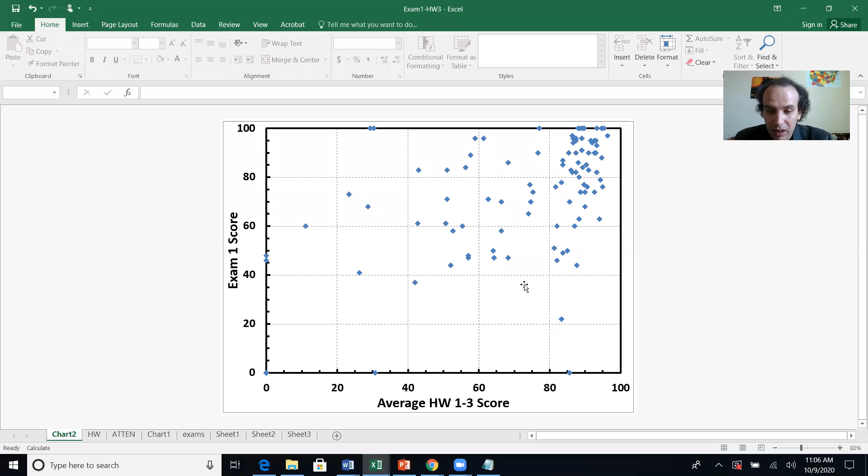Your midterm score will be based on your exam 1, with maybe some small correlation with homework. So if you really have a drastic change between homeworks and exam, I may correlate it. But basically your exam score is your midterm score, and you will see it posted. Does it make sense? I believe so.

Now I come back to my slides. You see my slides now, and I recall what we are doing here. Last time we discussed all our objectives, so basically we talk about closed systems, typically something like a piston cylinder assembly, which can be at constant pressure, constant volume, whatever it is. And we discuss processes. Unlike chapter 3, now we talk about processes. We will never have one state, we will have several states.

So we have a so-called quasi-equilibrium process between state 1 and state 2, for instance, and your task will be to identify both states and identify work done, heat transfer, change in energy, and so on. I repeat this because I want you to remember.

So you will have some kind of equation of the process here, and this equation should be known, should be considered. Now, you will have the first law, which is energy balance. I considered it last time. And what is boundary work?

What is work here? Q and W, it's heat transfer and work transfer in this process. Please remember that work is not necessarily boundary work. It's okay, most likely we deal with boundary work in this class, but there may be other forms of energy, like electric energy, stirring, mixing. It may be something happening in a closed chamber with mixing. So please realize these items can be different. Potentially you may have one more source, which is work other, as I call it here.

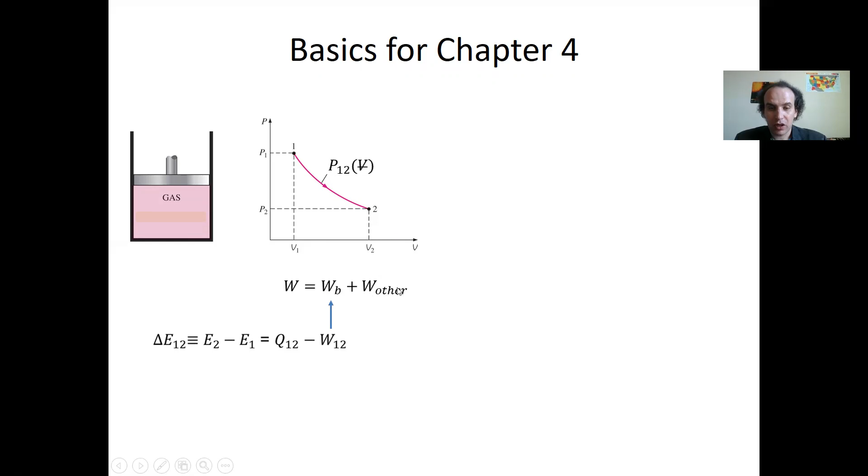Now you have this equation of the process. And also you know that your boundary work, only boundary work, is nothing but integral P dV, that's the surface area in this diagram. That's what it is. So in fact, what you're doing all the time is solving this set of equations.

But now, very often it will be simplified because you don't have some terms here. Well, you may have more terms, you may have more processes. So it may be not one process, you may have many of them. Then you should be able to do the system for each particular process, for this one, and this one.

And when you integrate it over the cycle, you will come to what? That energy does not change over the cycle, and you have that heat over the cycle is equal to work over the cycle. Q net is equal to W net. They both can be positive, they both can be negative, but they are not zero. And we are lucky because of this.

We are lucky that there is no conservation of work and heat, because they are additive and they are transformable. Energy cannot be destroyed or generated, but it goes from one form to another. So heat and work, heat can be converted into work and work into heat. Why? Because both heat and work are not functions of state, they are functions of the process. Remember, they're not a property. That's why when we start with one point and after a cycle go back to the same point, it will be zero for a cycle if it's a property, but it will be not zero for Q and W. Remember this.

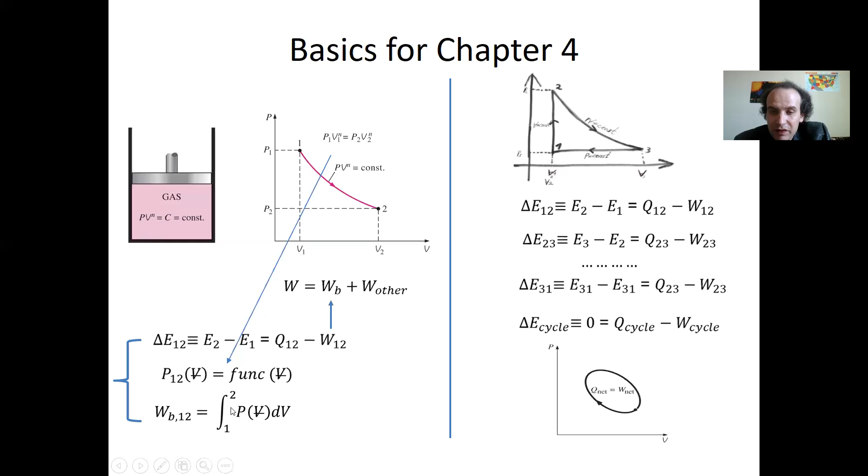Now, why polytropic processes? We considered this last time. One, because a polytropic equation of this form is easy to integrate. Second, because typical processes we have in practice are indeed polytropic. Remember, we discussed it for a while.

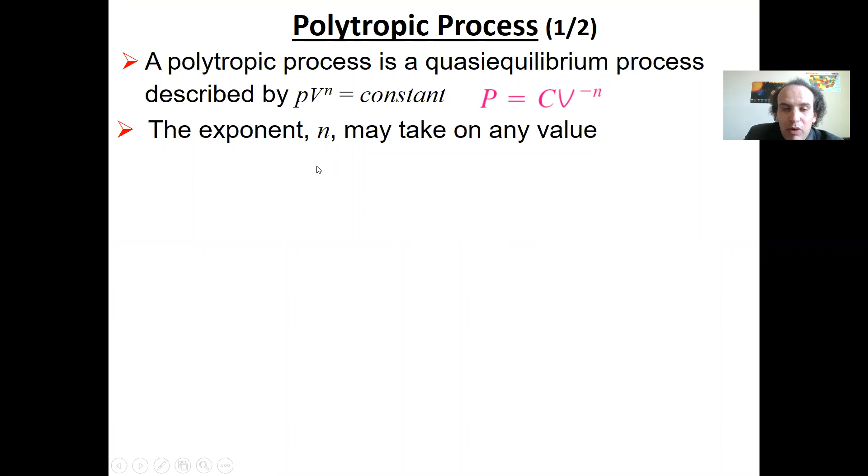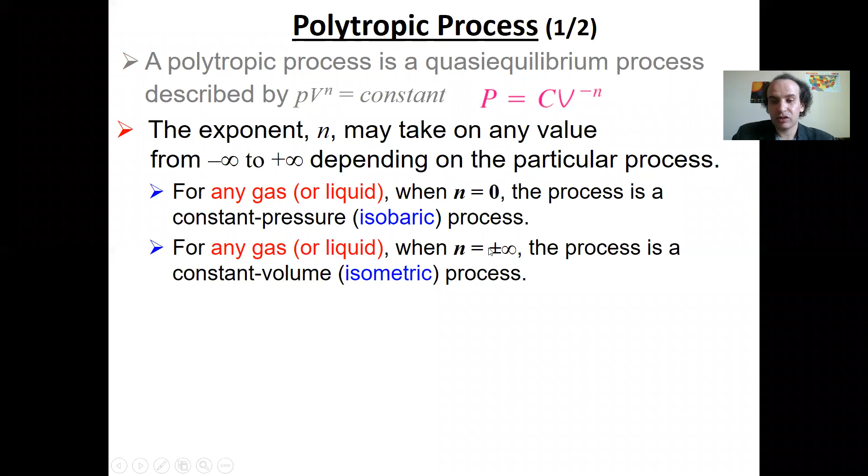So basically, that n here is some constant, and depending on what n is, you get some process that you know. For instance, if n equals 0, it's isobaric, pressure is constant. If n equals plus or minus infinity, for ideal gas, it's isothermal... actually if n tends to infinity, it's isochoric. If n equals 1, for ideal gas, we have isothermal process. And you have this table.

We didn't touch adiabatic processes yet—we'll talk about this maybe on Monday. But you may realize that all the iso processes we deal with—isobaric, isochoric, isothermal, adiabatic, isentropic later—they are actually polytropic. That's why it's so convenient to consider the polytropic process: it describes reality, and second, it gives you nice formulas. You're able to integrate on the PV diagram and get results.

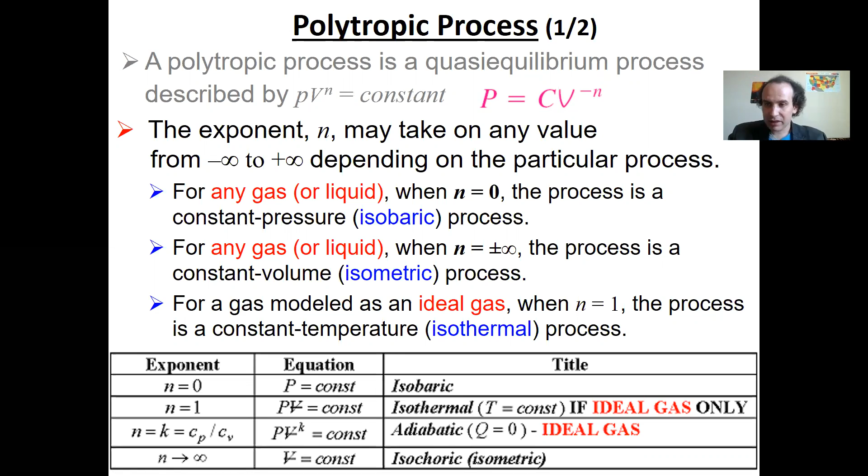Right, so remember these formulas, I recall we discussed last time. Generally speaking, for any n except for 1, your boundary work will be this formula. You see it, right? So basically you know the formula, you can use it. But why did we derive it? Because I recall you should not use this formula all the time.

For instance, if your n equals 1, it gives you a singularity. So for n equals 1, you should use this other formula—PV logarithm and volumes ratio. Okay, otherwise this formula is for arbitrary n.

Even for particular cases like isochoric or isobaric, it works. Because if you take n equals 0, you come to the formula selected in gray here, right—it gives you the isobaric process. If n tends to infinity, this formula gives you 0, as it should for an isochoric process. What is isochoric on a PV diagram? It's a vertical line, and there's no area under a vertical line, so it's 0.

Remember, if you have a rigid tank, boundary work is 0—dV is 0, the boundary does not move, the boundary cannot produce work. Does it make sense?

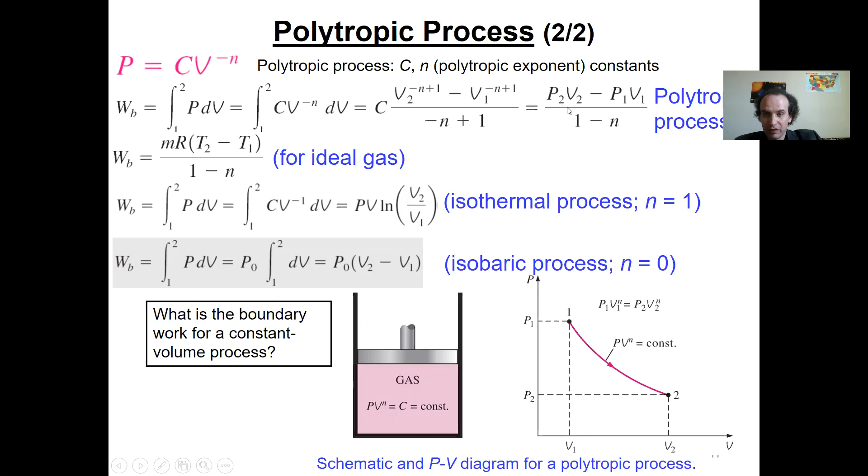Again, remember our classical convention: work is positive for expansion if it's done by the system, and work is negative for compression if it's done on the system—active and passive voice. So always remember, if you have expansion, it should be positive; if you have compression, it should be negative. If you get something different, something is wrong. Right? We discussed this last time.

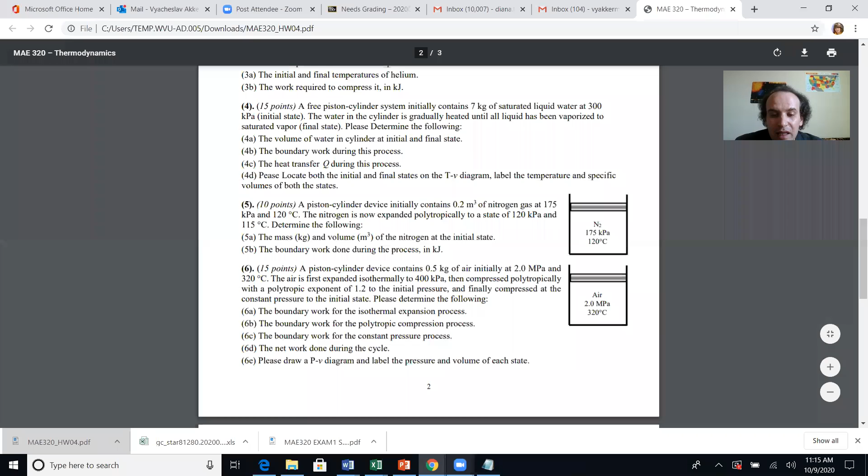And we also considered an example. I spend time on this again because it's some basics I don't want you to miss. This is something you need to remember—it's your homework—but I want to show you something else. I remember last time we considered a couple of examples from your textbook, and we discussed that boundary work is 0 if you have an isochoric process.

Here, you may see my screen—this is a PV diagram. What is an isochoric process? It's like this. Whatever it is, compression or expansion—here it's actually expansion, I mean here it's pressure drop and pressure jump. So basically what does it mean here? As soon as you don't have a change in volume, there is no surface area under this line, and boundary work will be 0.

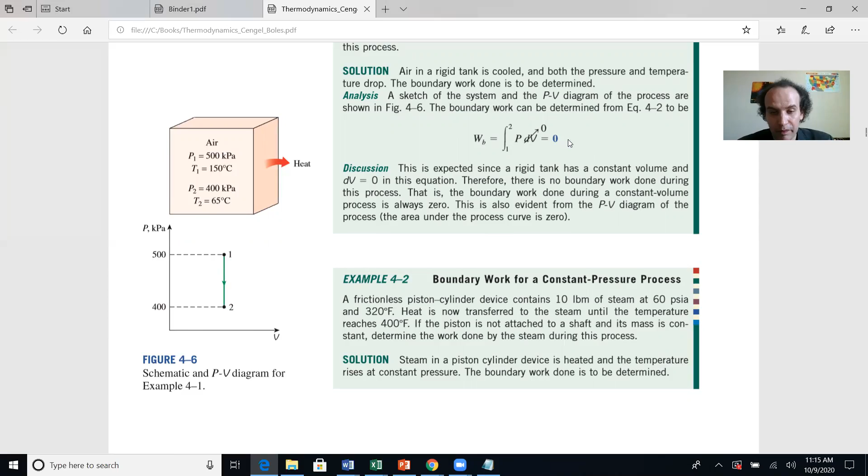For other processes, we consider what happens if you have an isothermal process, and you may realize here that it is, right? And basically last time we considered the example for ideal gas—you can look again, it's an example from your textbook. So how do we solve the problem? You use state 1, which was given pressure and temperature, identify state 2, and based on this you take your integration, and that's what you calculate, right?

And you find this value, and you got that boundary work will be negative because it's compression, right? It's compression—you go from state 1 to state 2, so this surface area is positive, but work is negative. Work equals minus this surface area. Any question about this?

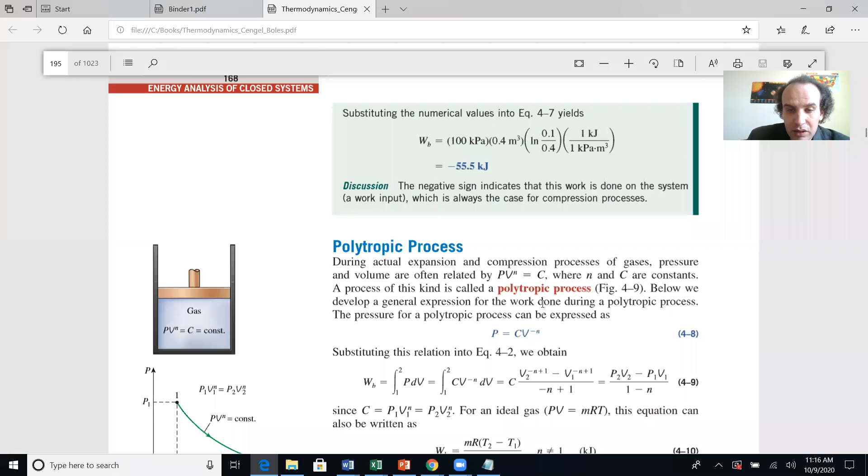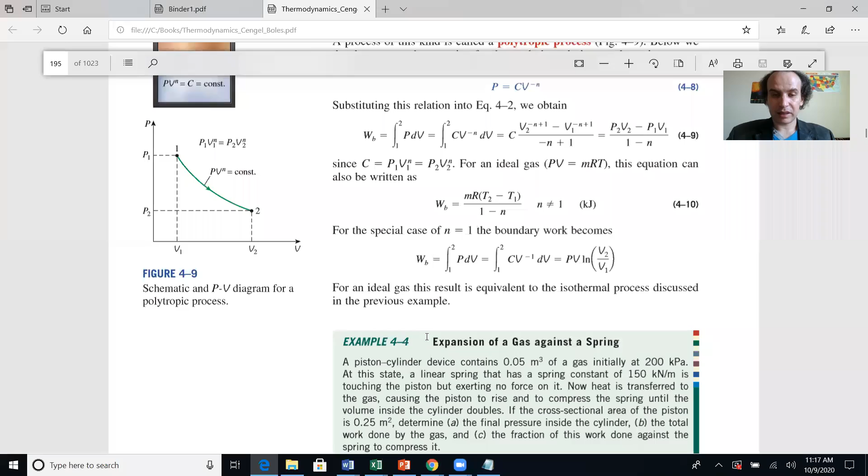Well, in the general case, you consider the basic equation, it will be like this. So basically, you don't know n. You should be able to solve this equation properly, identify another state from state 1, and consider it—and we considered these examples, right? So let me see if we can consider any more. I will come to this example a little bit later.

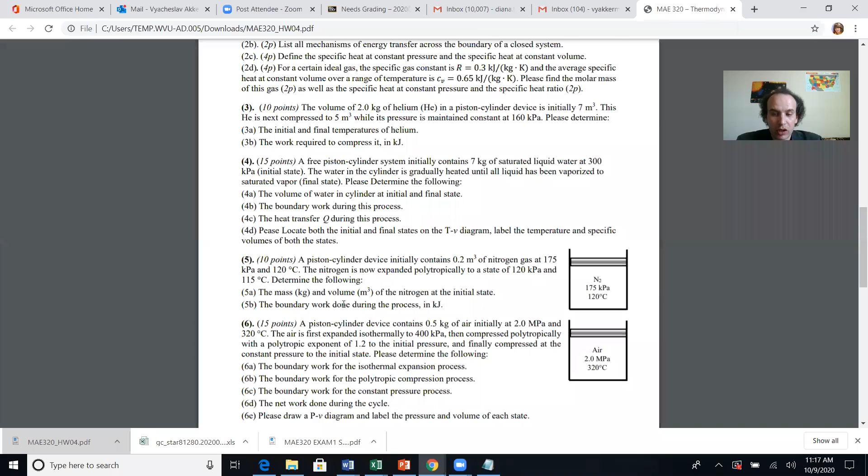Okay, does it make sense? So basically that is it. If you look at your homework, here is your homework. Let's look at it together.

Basically, here are your equations. Let's see what we have here. It's stated here, let's look, for instance, at problem number 6. Let's look together. What is stated here?

You have a piston cylinder device which has 0.5 kilograms of air initially at 2 megapascals and 320 degrees Celsius. Then air is expanded isothermally to 400 kilopascal, and then compressed polytropically to the initial pressure. Finally, it's compressed to the initial state. You will need to determine all these items like boundary work and so on.

So what should you do here? I request you to remember the following: in all problems like this, you identify states one by one, okay? You will identify states one by one. So what do you know here?

Do you know the state? So you have air at 2 megapascals and 320 degrees Celsius. Will you be able to identify the state? Yes. Now, what is stated there? Then air expands isothermally, so it's an isothermal expansion for an ideal gas to this value. Will you be able to identify state 2?

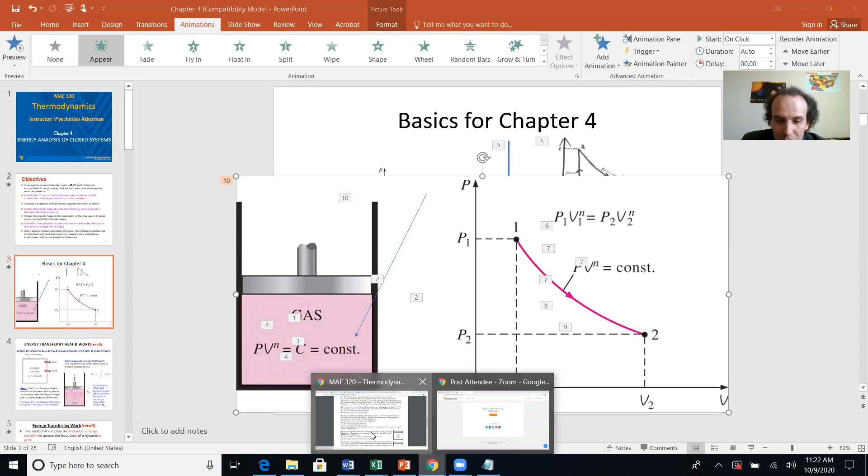So from here, you should be able to find N. It's not typical because typically you know N and you don't know other items, but here you should be able to find it. Now it's stated: please find the mass and volume of nitrogen at the initial state.

How do you find mass? Well, what is mass by definition? It will be density times volume, rho V, or it will be V divided by specific volume. Do you know your volume at the initial state?

Yes, you know. Do you know your specific volume at this given pressure and temperature? Do you know it? So will you be able to find it, the specific volume? Yes, exactly, you know ideal gas law.

So will you know mass and volume at the initial state? I believe so. Now what will be the final state? Will mass change at the final state? It's a closed system, so mass will be the same. But what about volume, will volume be the same?

No, volume will not be the same because it's stated here that you have polytropic expansion. So your volume expanded, you will have new specific volume, new total volume, right? And that's okay, mass will be the same because you change specific volume. Density will change. Does it make sense?

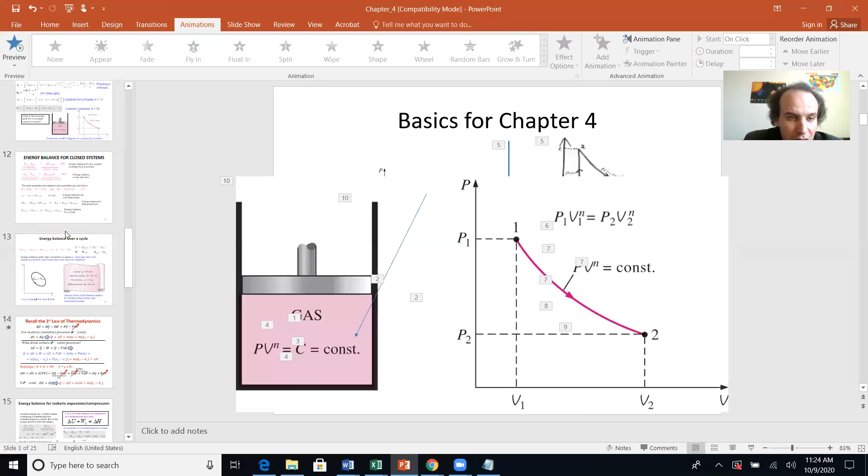You already know how to deal with it. Do you know the formula? Which formula will you use? You will use that formula? So what is your P1, V1, P2, V2? Will you know it? Yes. Will you know N? You will find it, right?

So that is it. Again, I'm not solving the problem here, I give you hints, it's your homework, you should solve your problem yourself, then you'll be good at your exam. But that's your typical strategy to consider: identify both states, then calculate boundary work and write down the first law. Does it make sense? Any question now?

Now, before we proceed to heat capacities, I want to focus specifically on the isobaric process. Remember, it's important: generally speaking, for an isobaric process, what will you have from this equation? You will have that boundary work is P delta V, right? It's understandable, it comes from here.

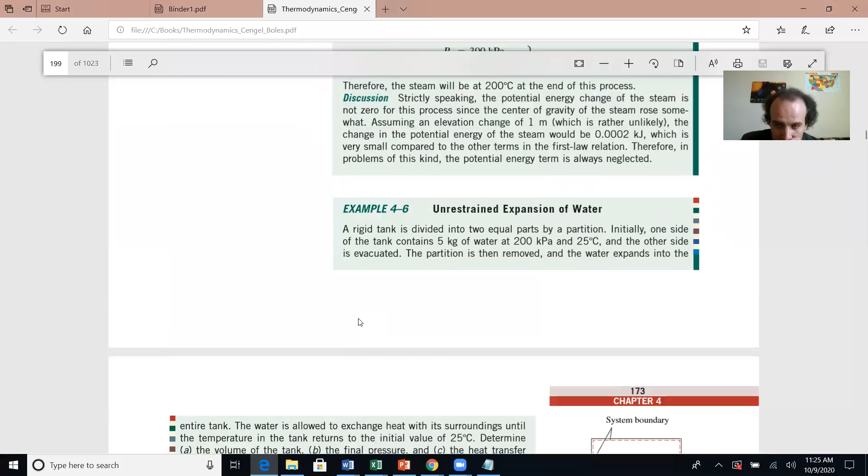Basically, if you look even in your example in your textbook, a simple example, like example 2, you will realize that for an isobaric process, this surface area, it will be the integral, so it will be P delta V, correct? That's what you have, P delta V.

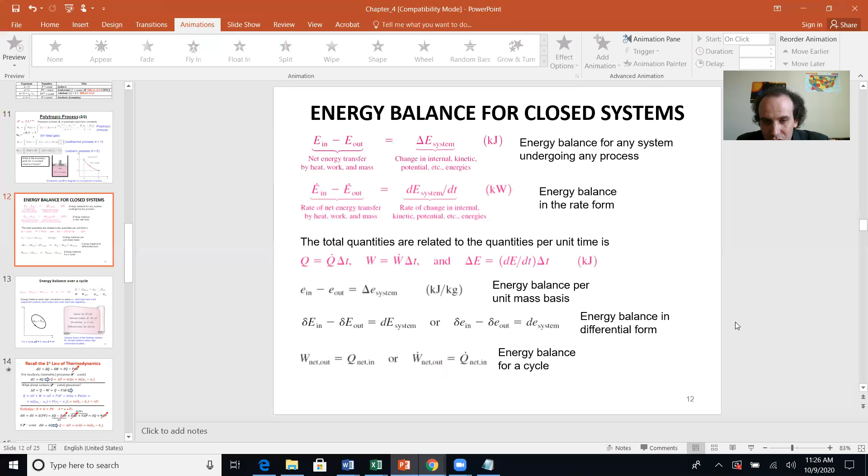But I want to focus on something else: on enthalpy and on heat transfer in that case, because remember what is enthalpy? We introduced enthalpy as U plus PV, and I told you that enthalpy will play a crucial role in this course, so you should be very flexible with it. Remember, enthalpy does not exist in reality, but it's a very convenient parameter which helps you solve the problem. It's like adjusted gross income. Remember, energy exists; enthalpy is just a combination U plus PV.

Now I recall what I did in chapter 3 because I want you to consider it seriously and solve some problems. So what do we have? If we write down the first law of thermodynamics in differential form, it looks like this: dU equals dQ minus dW, this is heat, this is work. I write delta here because they're not exact differentials, they're a function of the process.

So it becomes dU is dQ minus P dV, correct? So if I have an isochoric process, that is, if my volume is constant, what does it mean? It means my boundary work will be 0, and I have delta U equal to Q. So if you ask me what is heat transfer in an isochoric process, it's very simple to answer: it will be this. Correct? Does it make sense?

So internal energy is a good item to deal with, a good function to deal with for an isochoric process. But what about an isobaric process? In isobaric, will you have exactly the same equation? No, why not? Because for an isobaric process, this term is not cancelled, you have boundary work. True?

True, but we are still lucky a little bit, because for isobaric process it's still some simplification. So you don't need to take integral. You can do something simple. And for this reason, remember what we do.

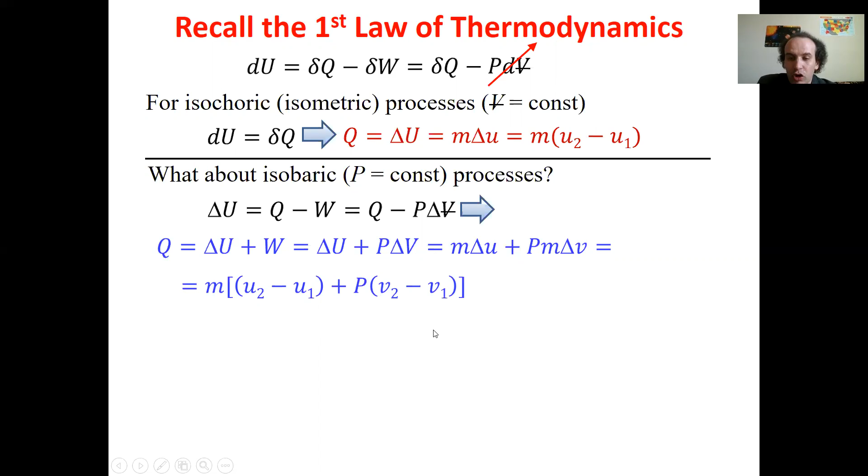So if my pressure is constant, I will take it out of here. I will write M delta U plus this, and I will come to this equation. Does it make sense? That is my Q. And in your homework, that is how you may calculate. That is your expression.

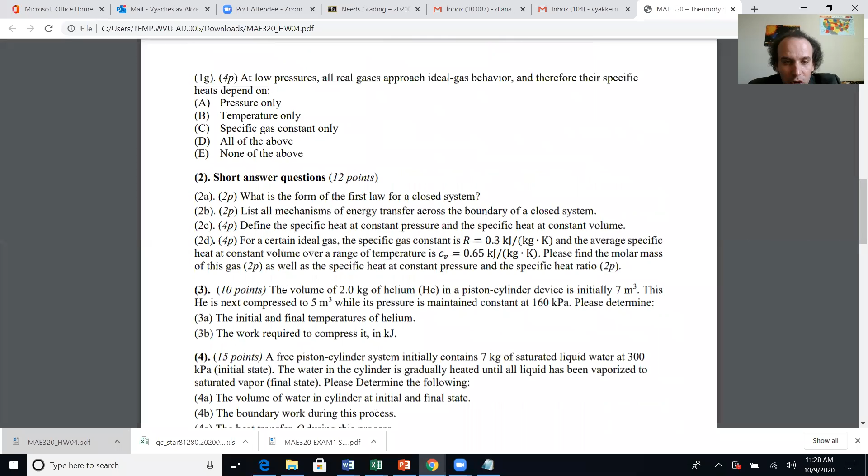And if I stop at this point and go to your homework again, what will I see here? Look here, for instance, homework problem number 4. It's stated: a free piston cylinder assembly initially contains 7 kilograms of saturated liquid water at 300 kilopascals. So state 1 is saturated H2O at 300 kilopascals.

So do you know the state? Do you know everything in state 1? If it's saturated liquid, you'll know VF, UF, HF, SF, right? All these parameters — specific volume, everything we need.

Then it's stated that the cylinder is gradually heated until eventually the liquid has vaporized to saturated vapor. So as a final state, you have saturated vapor only, correct? Do you know the second state? It will be saturated vapor at exactly the same pressure, 300 kilopascals. So you have the same pressure, and you know all final parameters.

Then it states, they ask you, what is the volume of water at the initial and final state? How will you find it? How to find the volume? Will you be able to find specific volume at the initial and final state?

I believe so. Will you be able to find total volume if we multiply by mass? I believe so. Will you be able to find boundary work and heat transfer? You may say, okay, boundary work will be P delta V, heat transfer will be exactly what we discussed here. But I recall something — that's why we introduce enthalpy.

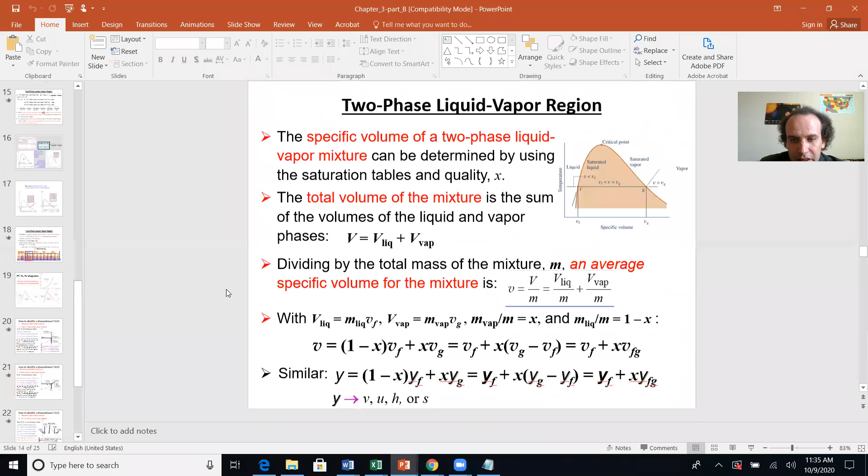Recall this, at this point, let me open again the slides that we dealt with for chapter 3, part B, right? And remember, we talked about this when we considered examples. I think it was here, right? Yes, here it is. Remember, that is the example that we consider.

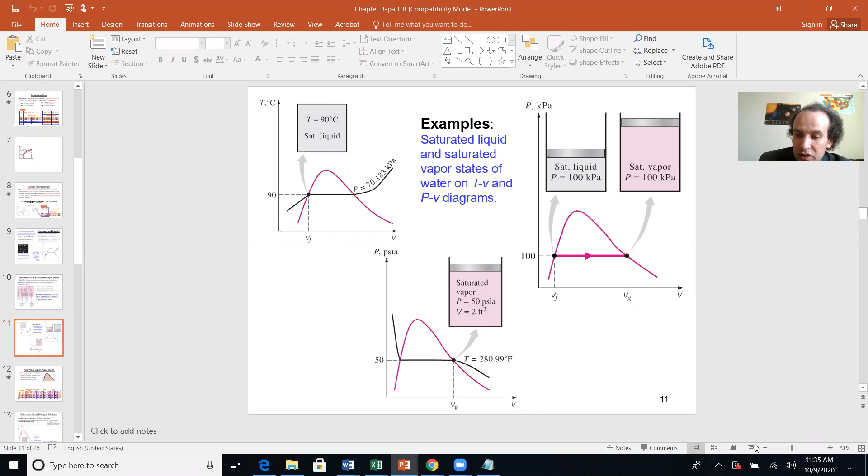You may see it on the screen. Remember? So what do we have here? This is exactly the example from your homework, but pressure is different. Now pressure is not 100 kilopascals, but 300 kilopascals. Otherwise it's the same.

So what do we have at the very beginning? This is saturated liquid, this is saturated vapor. So what will be work done if you consider it like this? It's exactly your example from your homework.

What is boundary work then? It will be this, right? Do you agree? So boundary work will be what? Here, it will be what? It will be P delta V. Correct? Do you understand? Do you agree with me?

But also what will it be in our case? Instead of V, you can write it like it will be what? It will be P, M, and what? What will be delta V? It will be V2 minus V1. Correct? Do you agree?

What is V2 and V1 in our case? It will be VG and VF. Do you agree? Everybody understands this? Everybody understand why mass is out of the brackets? Because mass is constant, since we talk about specific values.

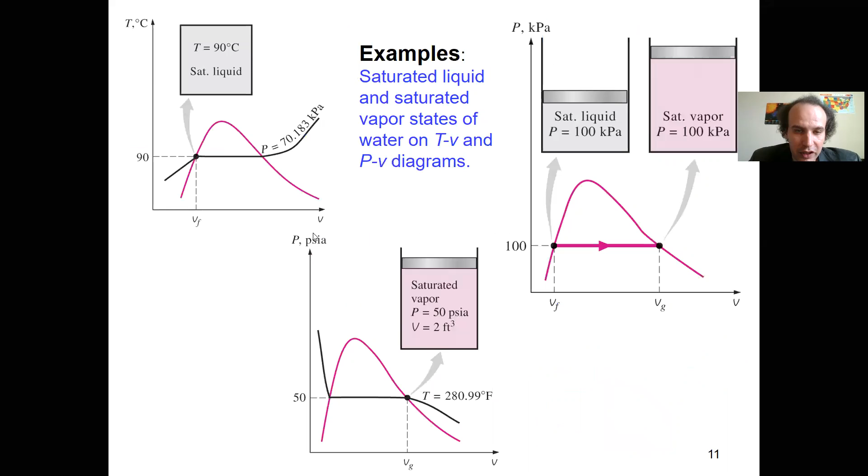I believe this is helpful. And the same story here. If you look at the screen, you can use this blue formula if you want. You can use it like this, and you will come to exactly the same answer.

What will be V1 and V2 here in all cases? It will be VF, VG, UF, UG. But altogether, it can be easily combined to this one, which we just calculated. Does it make sense for you?

This happens only if you have isobaric process. If pressure is not constant, what I'm talking about will be wrong. Do you agree with me? It will be wrong, and you cannot use it. Please understand, it will be wrong.

If you have isochoric process, what I'm talking here will be okay, but it will be useless, because you don't need to calculate boundary work at all. Does it make sense?

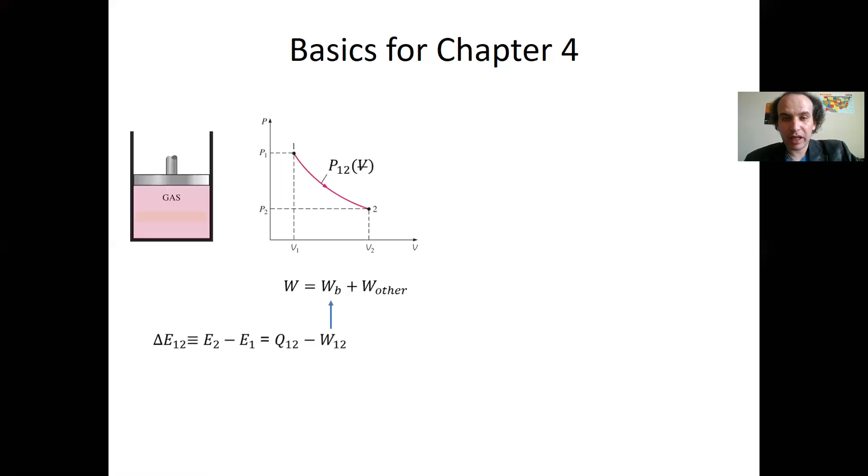Again, I recall when you write the first law, like you did it here. You should realize that generally speaking, you may have boundary work plus something else, like electric work. You have a very good example in your textbook, and we discuss it, and now let me discuss it again.

Before I go to the textbook, let me go back to your homework problem, here it is. So do you know now how to solve problem number 5? Everything is clear? Everything is quite simple now? And problem number 4, everything is clear now?

So did you say for an isothermal process, Q equals M delta H doesn't apply? Is that what you said? Yes, it does not apply. Why? Let me ask you vice versa, why should it apply? Temperature is constant.

What we derived here was when pressure is constant. Do you agree that everything I talk about here is when pressure is constant? If pressure is not constant, everything will be different. Do you agree? Yeah, okay, that's why. For the isothermal process, you consider just a very general equation, because now you need to take integral PdV instead of taking P delta V.

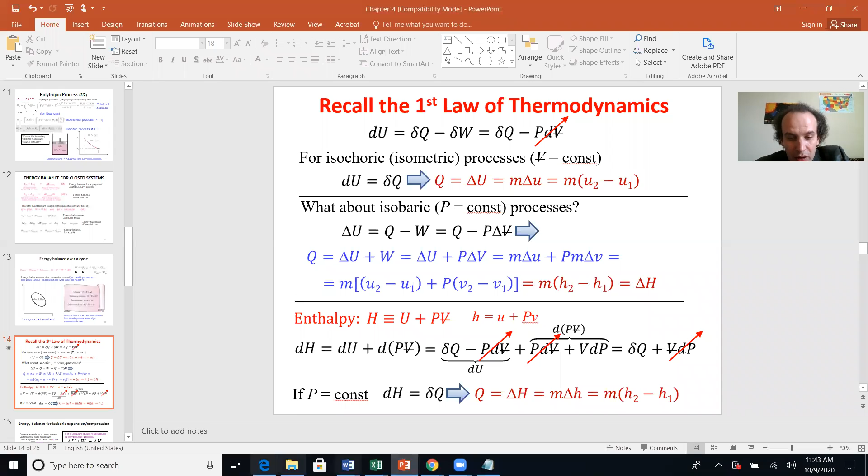So basically, if you talk about your homework problem number 4, does it make sense how to solve it now? Here you are lucky. When you read about free piston cylinder assembly, you are lucky to use the simplification, and basically all these equations can be solved. In the general case, if you have different pressures, like you see in problem number 3, you solve your equation like it is. That's a general form. And now you should also be able to get your knowledge from the text.

If it's stated you have a rigid tank, it means volume is constant. If it's stated you have a free piston cylinder system, it means pressure is constant. If it's stated it's isothermal, temperature is constant. If it's stated it's adiabatic, Q is 0. Based on this, you may get some knowledge, some data that you can use.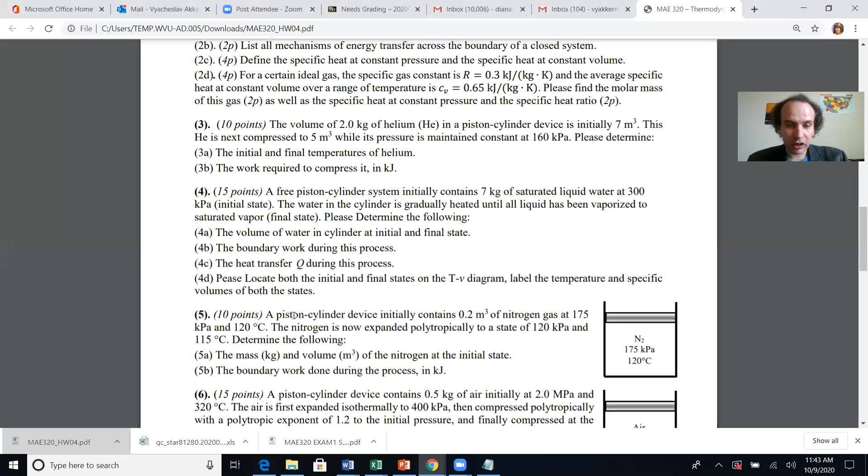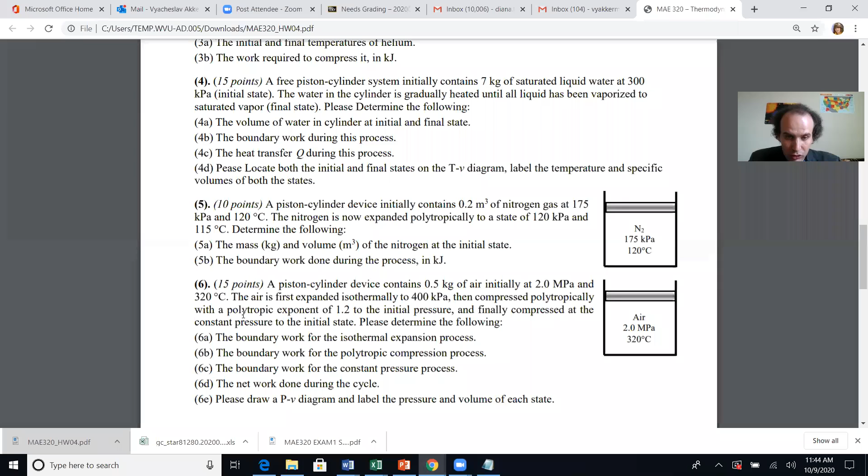In your homework, in the textbook, I believe you know how to solve problems number 4, 5, 6 now. It should be more or less okay for you. Please, you have this weekend ahead. Please do it, and if you have questions, bring it on Monday, because it's really important. Again, it's something basic, but something simple. When you get it, it will be easy. If you don't get it, you're stuck.

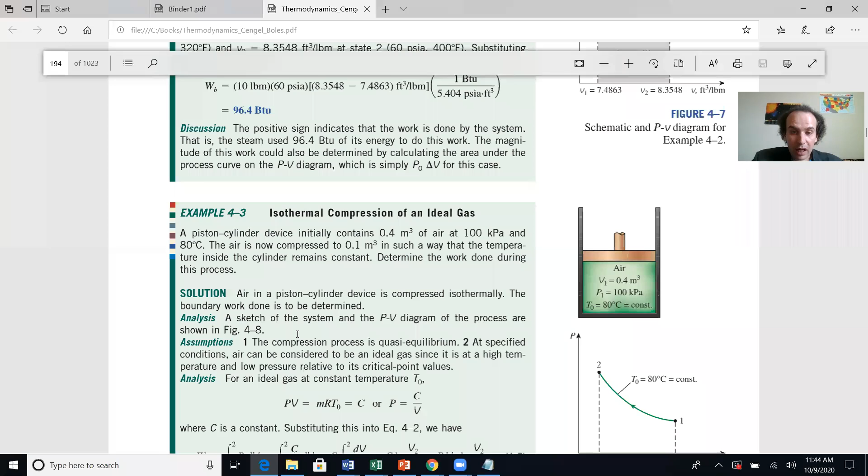So please do it. Now, in fact, we discuss this problem. So again, only if constant pressure, we come to this topic. You have these relations between delta U and delta H, you have this formula. You may ask, why don't you use it for an isothermal process? The answer is simple: because we derived it only for isobaric. What you see here in the formulas is exactly what we talk about.

What we talk about here is that instead of, in addition to, boundary work, you may have something else. You may have extra work. So what you see here is exactly what I discussed in the first slide. Remember, here we have this term and you have energy change. I have W equal to boundary work plus other work.

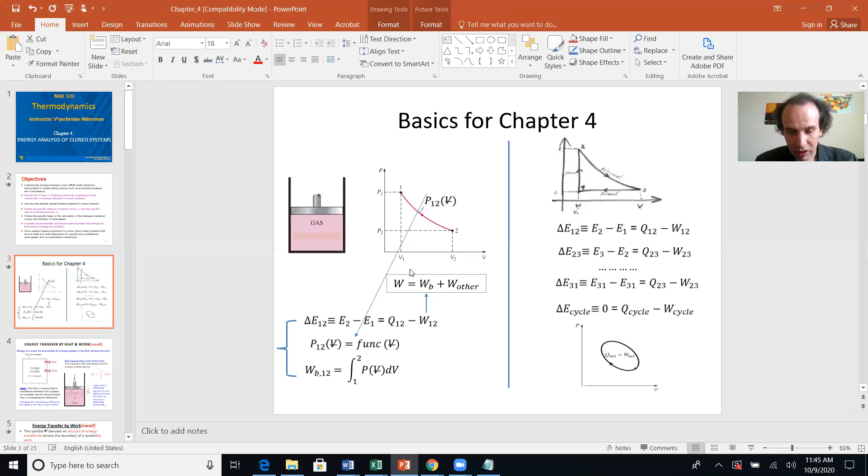Then I should account for it, and that's what I have here. On the left-hand side you see what I write: Q minus W is delta U. It's nothing but the first law, as often you neglect kinetic and potential energy.

But now we realize, what is W here? It's nothing but a combination of this. You express it as other work plus boundary work. What is your boundary work for an isobaric process? It will be here. That's how you arrive at this formula: Q minus this work, which can be electric work, it can be anything, minus this gives you delta U.

Now you see what you see here. You have this equation I wrote. I combined U together, and do you agree that this equation can be rewritten like this? It's the same, right? I just changed parameters, changed the order of terms. Do you agree that this is enthalpy? What is this one? It's enthalpy.

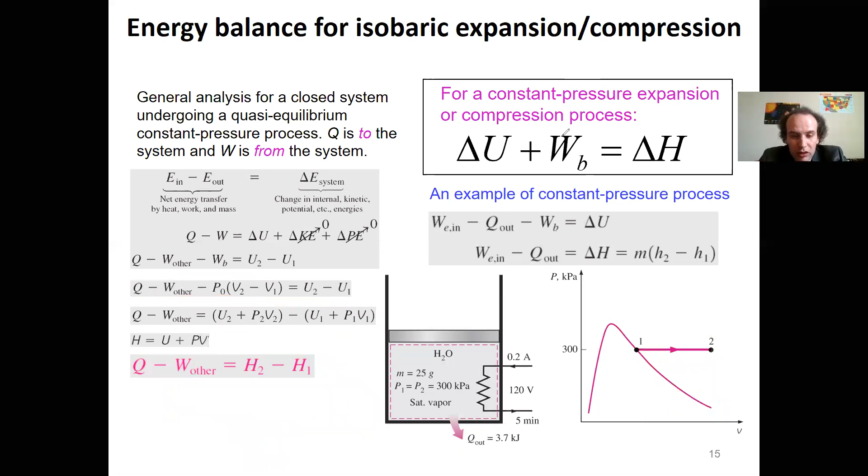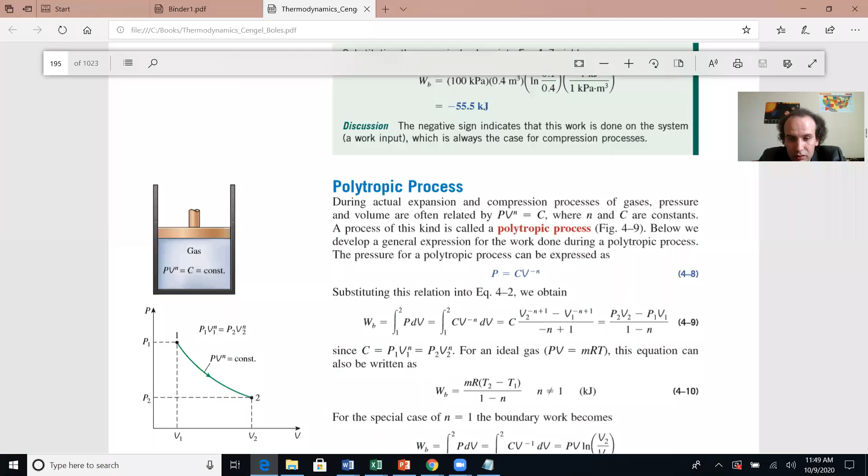Let's consider this on the screen. Here is the example from your textbook. You may read the text again. You have this piston cylinder assembly, exactly the same. Initially you have 25 grams of saturated vapor at a given constant pressure.

You put this resistor heater with given current and voltage, and it works for 5 minutes to deposit electric work into the system. What happened with your system? In your system you will have superheated vapor, and at the same time your system will expand, so eventually we'll have another volume here, and at the same time you'll have some heat loss. That is a picture just exactly like we discussed on the slide. So what will be our equations? I won't repeat it again.

Do you understand that these are exactly the same equations that we discussed? So what we have here is our balance equation, that heat minus work together gives you U2 minus U1. So this is our equation, and we come to the following: Q minus work done by others is like this.

Now, what is this again, and what is this? It's enthalpy. And what is this? It's, as we discussed, work done by electric setup. So that's all. Will you be able to find Q from here?

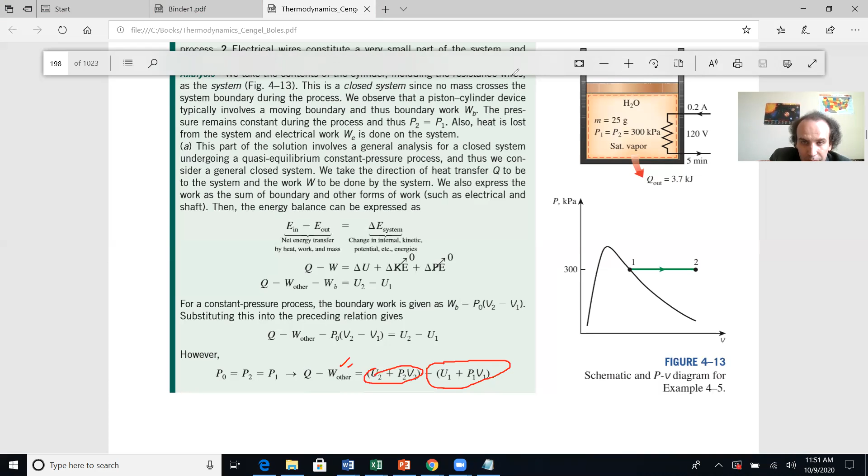You should. Here it is, right? So you will find Q, and whatever you need to find from here, you will find. Do you know state 1? You have state 1. So from here, you will be able to calculate enthalpy 1, and from here you will calculate H2. And then when you know H2, you will definitely be able to calculate state 2.

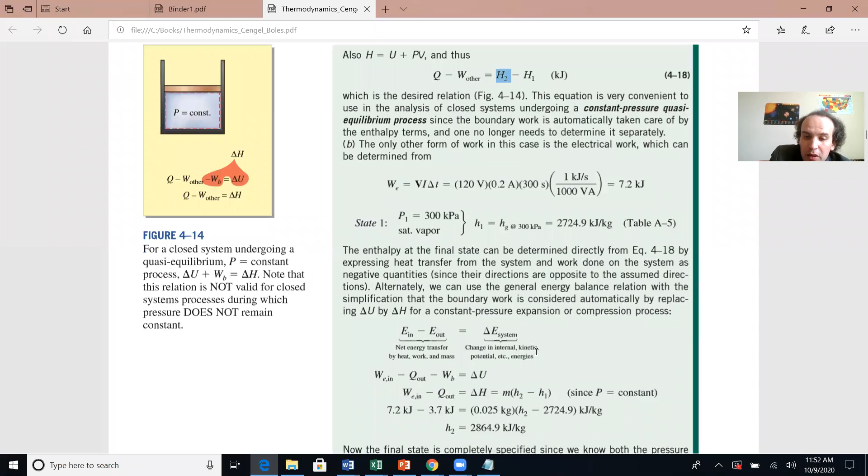So in this equation, what do you know? Do you know state 1 entirely, right? Do you know Q? Do you know work done by the other setup, which is electric work? Yes. Will you be able to identify H2 from here? If you know H2, will you be able to identify small h2, which is specific enthalpy, from here?

If you know h2 and p2, you'll be able to get temperature. So instead of saturated vapor, you will have superheated at this condition. Does it make sense?

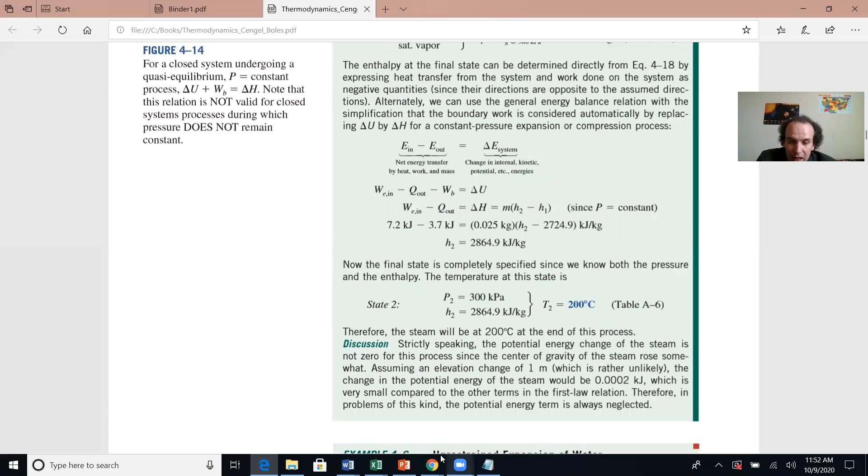Please ask me something. So that's the basics, and now you are mostly ready. Please go through this example yourself at home, and you will see that now you can solve most of the problems from this homework.

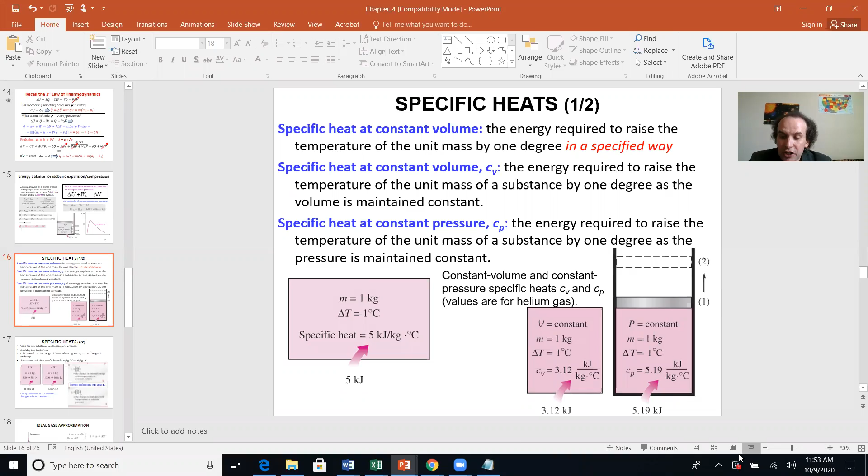The only part left after this is what we call heat capacity. I will do this on Monday. Heat capacities, or specific heats, tell you how much heat you may consume if you proceed in some specific way. Because remember, if you have isobaric, isochoric, or other processes, you need different amounts of energy to increase your temperature by 1 degree.

If you have an isothermal process, how much energy do you need to increase your temperature by 1 degree? It will be infinity, because you never change it. If you have an adiabatic process, how much energy do you need to change temperature by 1 degree? You need 0, because it's adiabatic — you don't have heat exchange. But for a typical process like isobaric or isochoric, this is a finite value, and we will consider it.

Basically, why I will talk about this on Monday — but what I want to show right away, coming back to this formula, it's very important. If you look at this formula, for an isochoric process, delta U is equal to Q.

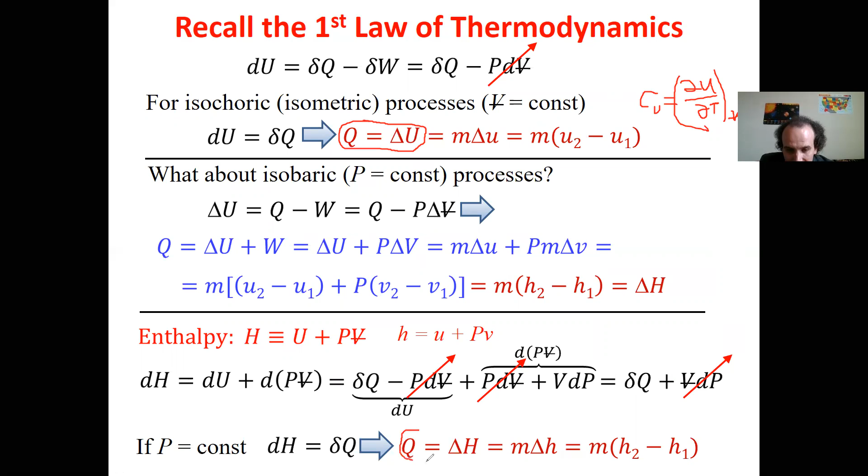From here, you will see that Cv, heat capacity at isochoric process, will be nothing but dU over dT at constant volume. While for an isobaric process, the same story: if pressure is constant, Q is equal to delta H. So from here, my Cp will be nothing but dH over dT at constant pressure. People use these two formulas as the definition of Cp and Cv.

Why? Because U and H are properties. They are in the table. They are functions of the state. So your Cp and Cv, your heat capacity, also become properties — they become functions of state. That's something you should realize and be careful about.

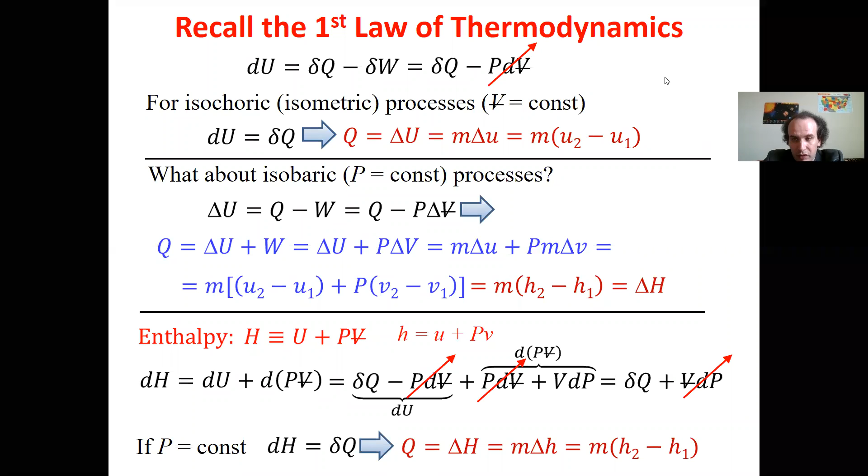No, for an isothermal process, Q equals m delta H does not apply. Yeah, it does not apply. I did not say isothermic — I don't know what isothermic is. I know isothermal, isochoric, isometric. Maybe you meant isometric — isometric is the same as isochoric, but it's not isothermic. Isothermal means temperature is constant.